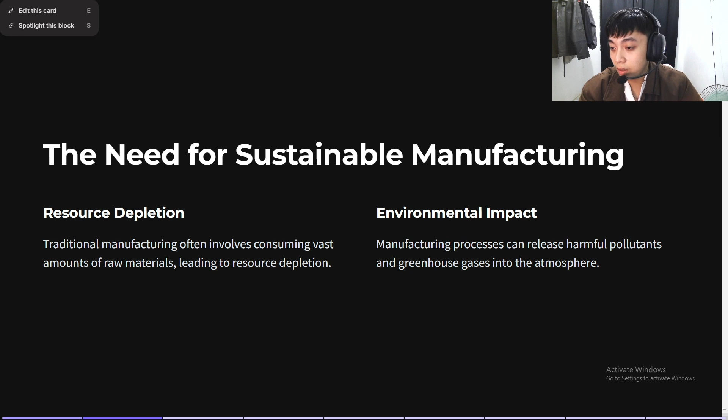Transitioning to sustainable manufacturing benefits everyone by protecting natural resources, reducing pollution, and ensuring a healthier planet for future generations. It's not just an obligation, it's an opportunity to innovate and lead into a greener economy.

Okay, next is pre-combustion capture. Pre-combustion capture is a method of removing CO2 before the fuel burns. It is commonly used in processes like integrated gasification combined cycle systems, where fuels are converted into a cleaner gas before combustion. This approach is highly efficient but requires facilities to be designed or significantly modified to accommodate the process.

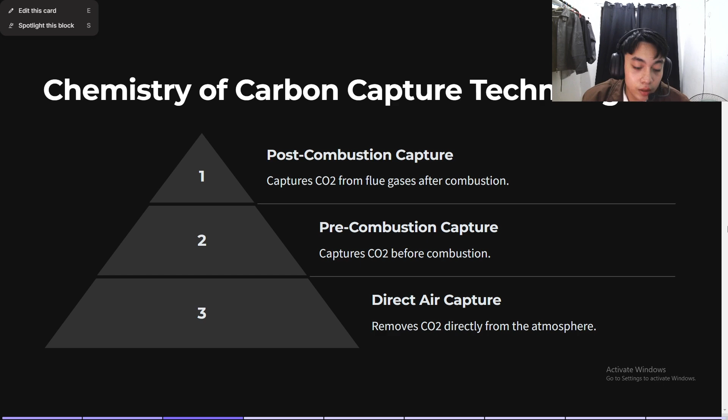So next is improving selectivity and adsorption capacity.

Advancement in carbon capture materials. We have here metal organic frameworks, zeolites, and activated carbon. So what is advancement in carbon capture materials?

Carbon capture materials: innovative materials play a vital role in improving the efficiency and cost effectiveness of carbon capture technologies. Among these materials, metal organic frameworks, zeolites, and activated carbon have shown significant promise due to their unique structures, high surface areas, and selective adsorption capabilities. Here's an in-depth look at each of these materials.

First is metal organic frameworks, or MOFs. MOFs are highly porous materials composed of metal ions or clusters coordinated to organic ligands. These frameworks create a three-dimensional structure with an exceptionally high surface area, making them ideal for gas adsorption and separation, including CO2 capture. How MOFs work in carbon capture: gas adsorption.

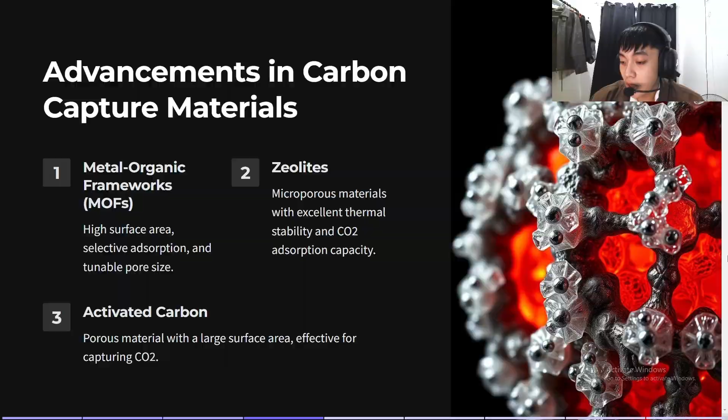Next is catalysts and reactive sorbents for CO2 removal. So reducing carbon dioxide, CO2, in the atmosphere requires innovative technologies that enhance efficiency while minimizing energy consumption. Catalysts and reactive sorbents play vital roles in carbon management strategies, each contributing uniquely to CO2 capture, storage, and conversion.

So, how do catalysts work? Catalysts are substances that accelerate chemical reactions without being consumed during the process. In CO2 removal, they enable and enhance the chemical transformation required to convert CO2 into valuable products such as fuels, chemicals, and mineral carbonates. CO2 is a stable molecule and transforming it into another compound typically requires a significant input of energy.

Catalysts lower the energy barrier, the activation energy needed for these reactions, allowing them to occur more readily at lower temperatures or pressures. Catalysts are engineered to promote specific chemical pathways. For instance, catalysts can favor the formation of methanol over other products when reacting CO2 with hydrogen.

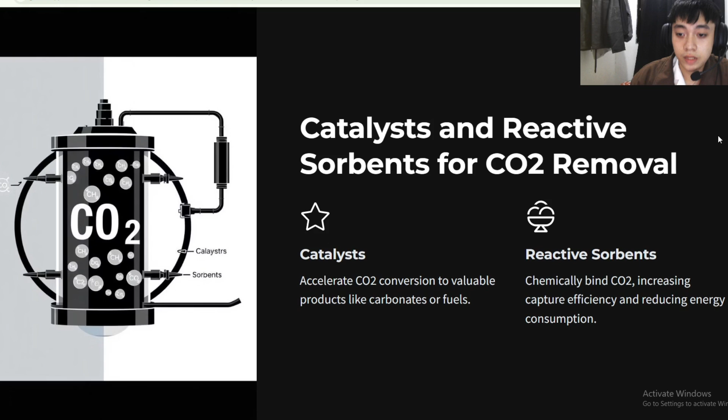Reactive sorbents are materials designed to chemically interact with specific substances in their environment to capture or remove them. Unlike passive sorbents which rely on physical adsorption, reactive sorbents engage in chemical reactions with target compounds, transforming them into a different, often non-harmful form. Reactive sorbents undergo a chemical reaction with the target substance. For example, amine-based reactive sorbents bind with CO2 to form carbamates.

They are engineered to interact specifically with certain molecules, improving efficiency and minimizing unintended reactions. Many reactive sorbents can be regenerated after use, allowing the captured substance to be released for disposal or reuse. These materials are increasingly used in sustainable technologies due to their efficiency and potential for reuse, aligning with modern environmental and engineering goals.

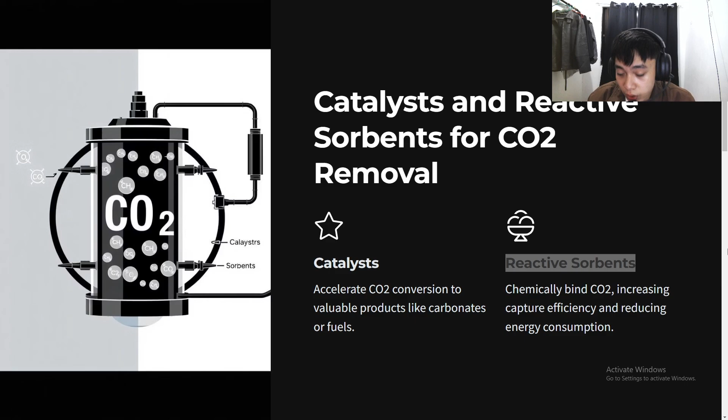Next is energy efficient carbon capture processes. Number 1, membrane separation. Uses specialized membranes to selectively allow CO2 to pass through while blocking other gases. It's energy efficient as it avoids chemical solvents and is ideal for industrial applications. Number 2 is electrochemical CO2 capture. Employs electricity to separate CO2 through electrochemical reactions, potentially powered by renewables. This method is energy efficient and avoids thermal processes.

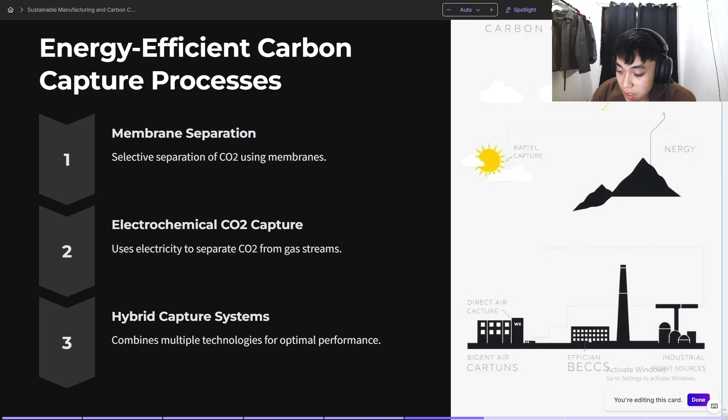Number 3 is hybrid capture systems. Combines technologies like membranes and chemical methods to maximize efficiency and adapt to different scenarios, balancing cost and performance. Energy efficient carbon capture technologies like membrane separation, electrochemical capture, and hybrid systems offer promising solutions for reducing emissions. With advancement in these processes,

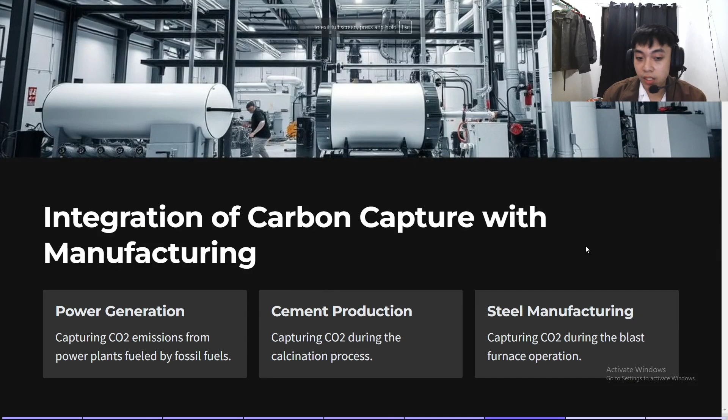So next is integration of carbon capture with manufacturing. Carbon capture technologies are increasingly integrated into manufacturing to reduce emissions from high carbon industries. In power generation, CO2 is captured from fossil fuel powered plants before it is released into the atmosphere. Cement production incorporates capture systems during the calcination process, where significant CO2 is emitted from limestone decomposition.

Similarly, steel manufacturing uses carbon capture during blast furnace operation, targeting emissions from combustion and chemical reactions. Integrating carbon capture into manufacturing not only mitigates industrial emissions but also supports sustainable production, paving the way for a low carbon economy.